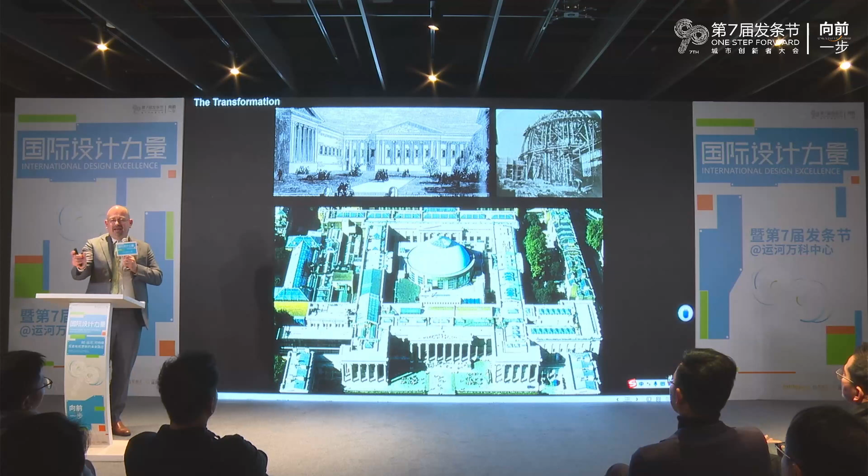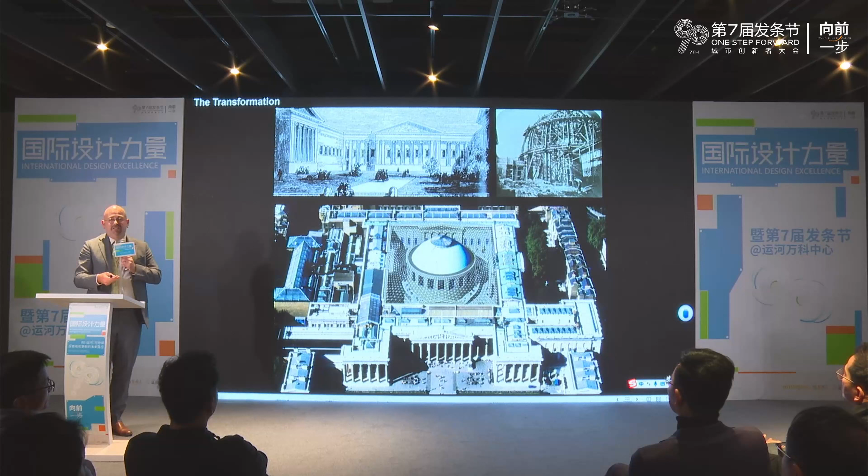The first project, the British Museum, is an old institution that's been around in London a long time, but like most institutions, it needs a refresh once in a while. What happens very often with old buildings is they accumulate many extensions, bits get added on, and they become quite messy and confused. Our approach was to strip away all the bits that weren't inherent in the original, and create this great court in the center. By stripping away the unnecessary bits, we created a whole new space for the public, and this has become one of the most popular tourist attractions in London, a major square in itself.

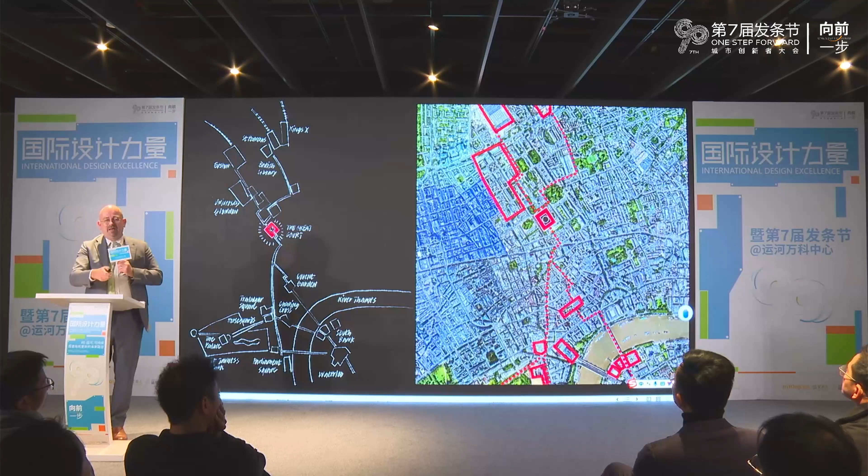Another view to the side, you can see the bits that were added on and then stripped away. By really understanding the buildings you're working with, you can shape them into something new — again a 1960s addition there, stripped away. Not only does it create space, it also enhances the appreciation of the original building. Perhaps most importantly, this has become a square in the city, linking together this whole network of spaces throughout London. Instead of being a barrier, now it's another public space for everyone. I think how we can creatively reuse these buildings can make a difference.

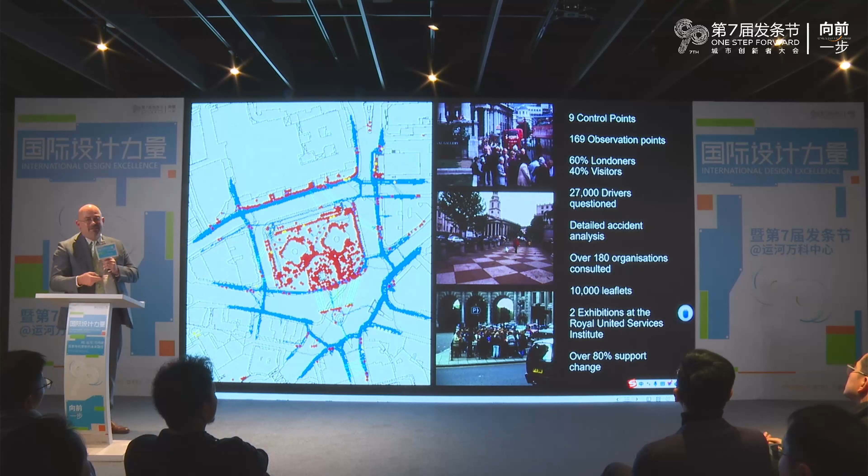Something that seemingly seems quite simple was in Trafalgar Square, where we closed off a road — that sounds relatively simple in itself. It created this amazing space; Trafalgar Square was effectively a roundabout, and now we're turning it into a major public plaza. But for that to happen took an incredible amount of analysis: 27,000 drivers were questioned, accident analysis, traffic analysis. So much detailed work had to happen to make that a reality.

And of course, all the public consultations we had to undergo. Although it was just a case of shutting a road, it was an incredible amount of work. Before, it was completely closed off; now we get the public moving in, so it's transformed this underused area into a major public space. The centre, which was underused, becomes now a place for entertainment, and it's now possible to even hold some very large events there. For example, when London won the bid for the Olympics, there was a big celebration there, and of course Chinese New Year is always celebrated there in London for thousands of people.

The Reichstag in Berlin is a building that was heavily bombed and damaged during the war, so it had a lot of history to it, and how we reinterpreted that history was quite important. It's also important to mention that you can make these sustainable buildings — here we're using solar panels, biofuel to operate the building, and also using thermal stores, so we can make them sustainable.

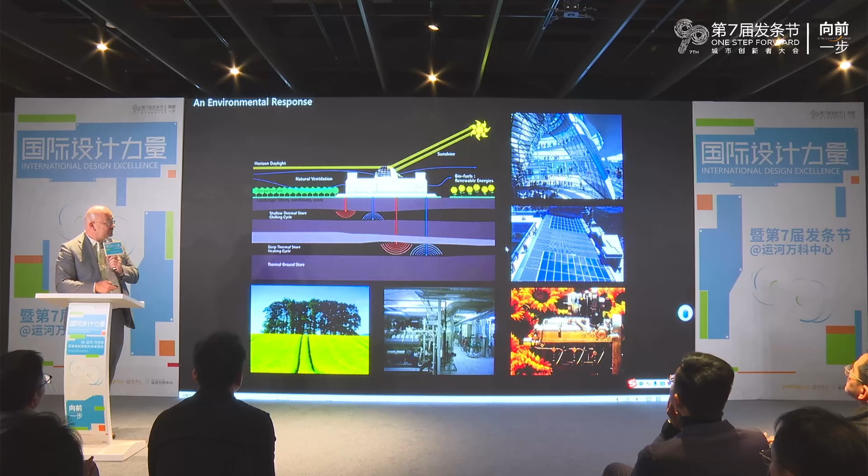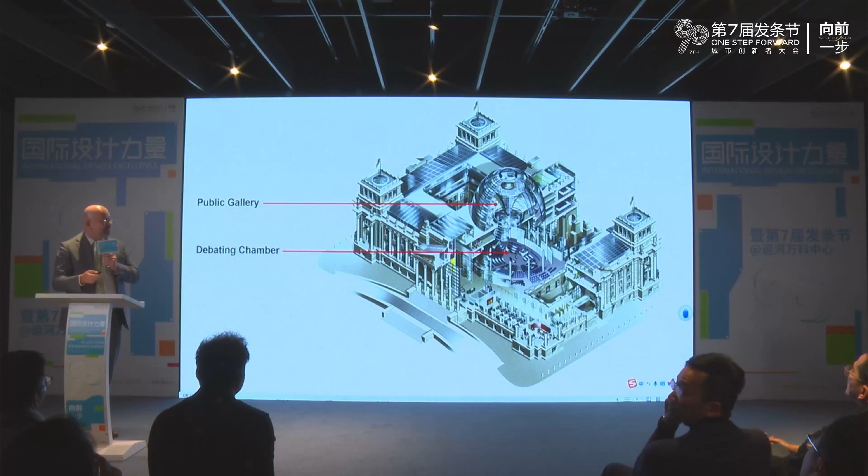So basically the big spaces, we had the new debating chamber at the base, and above it we incorporated this new public gallery.

On top of that, we also preserved a lot of the history. There was a lot of graffiti, and I think your initial reaction is to strip that away, but there's a lot of meaning in this graffiti. While we couldn't keep all of it, a lot of it was documented, and some bits were kept to keep the memory of the building alive.

The public gallery on top has two meanings. One, you can look down to the debating chamber below to see what's going on. But also you can walk up the spiral ramp and get incredible views across Berlin. This has become probably the most popular tourist attraction in Berlin.

So it's not just regenerating the building, but the whole area around it as well—transforming all the businesses and things that happen around it. I particularly like this image because you get this contrast of the old and the new, and how working together you can create some very powerful projects.

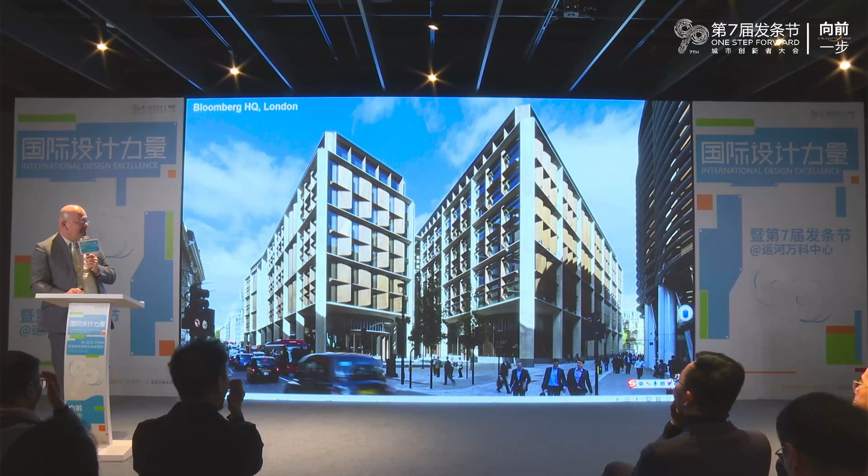Back to London, this is the new headquarters for Bloomberg. It replaced this old 1960s building for Legal and General, in a very historic part of London, very close to St. Paul's.

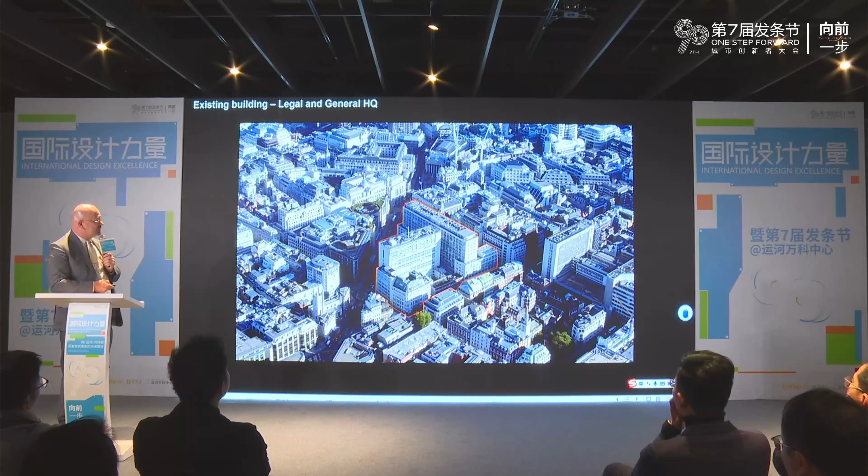The idea was that it shouldn't be brash, it should be respectful to the history of the city and its surroundings, so it needed to blend in. That came from Michael Bloomberg himself. So you can see the modern building still uses traditional materials of that part of London, like Portland stone and bronze.

You're probably not aware there's a height restriction. We have in London these view corridors to St. Paul's, so the dome of St. Paul's is never obscured—there's about 7 key viewpoints around the city. So we had to adhere to that.

We also looked back at the history of the city, and this was an old map that we found that gave us a clue of how we could reintroduce this historic lane back into the city that had been lost.

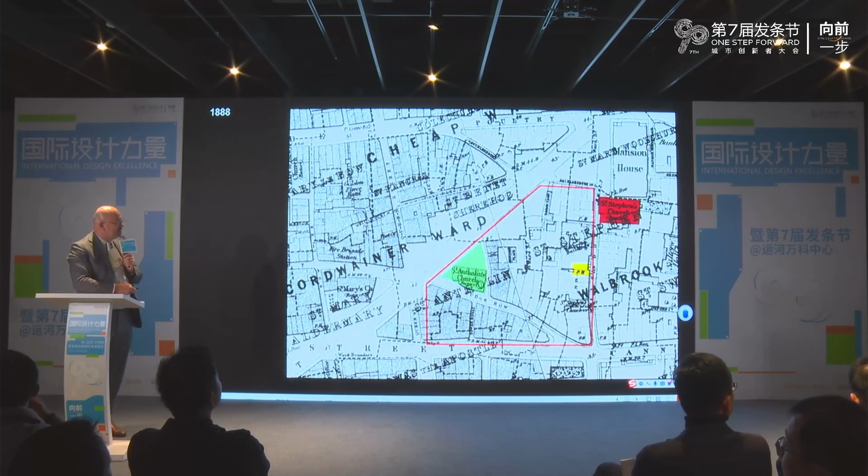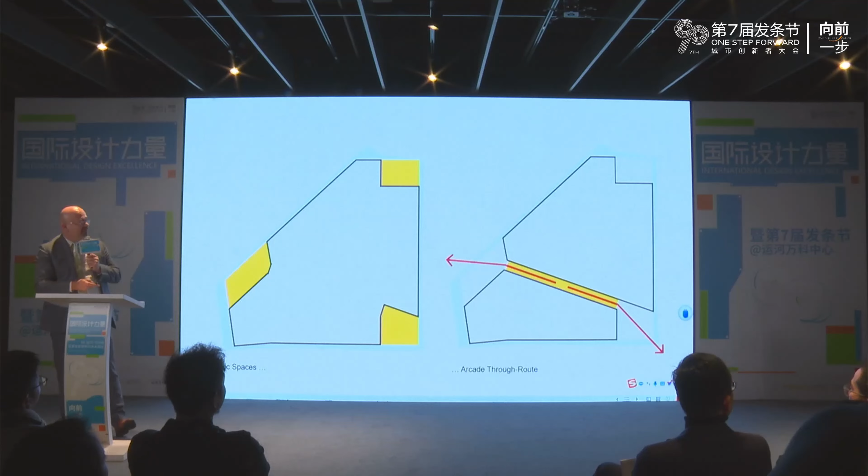So we introduced 3 public squares on each of the corners, and then we cut through this arcade to reintroduce that historic route. You can see here where you've got this now pedestrianised route up to St. Paul's, and the opportunities that it gives you inside the building.

This space is actually where all the staff come as a socialising space, and they get this fantastic view of St. Paul's. At the base of the street, we reactivate the street, we introduce retail, and the arcade is now a new pedestrianised route full of retail—bringing life into a new part of the city.

The squares themselves—you start to see the people occupying them, but they also have a dual role. This is also acting as a protective barrier for the building, but it's a social space in the city.

This is an old church by Sir Christopher Wren, the architect of St. Paul's. You can see how one of the squares is relating to that historic building, giving you this contrast of old and new sitting together quite comfortably.

The building itself was quite complex. The idea was that all the staff could see each other, so it was all about communication—it was one big team. They wanted all the staff to visually see each other.

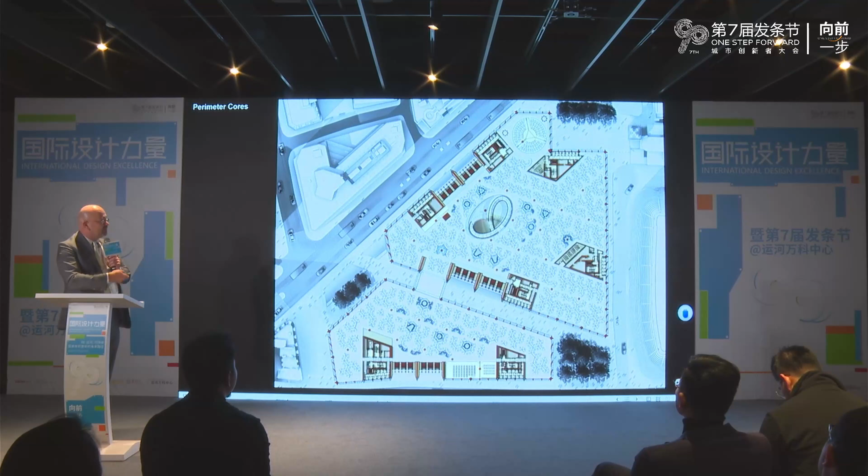This led us to putting all the cores on the outside of the building, which is a bit counterintuitive when you want light and views. But it was all part of the company strategy.

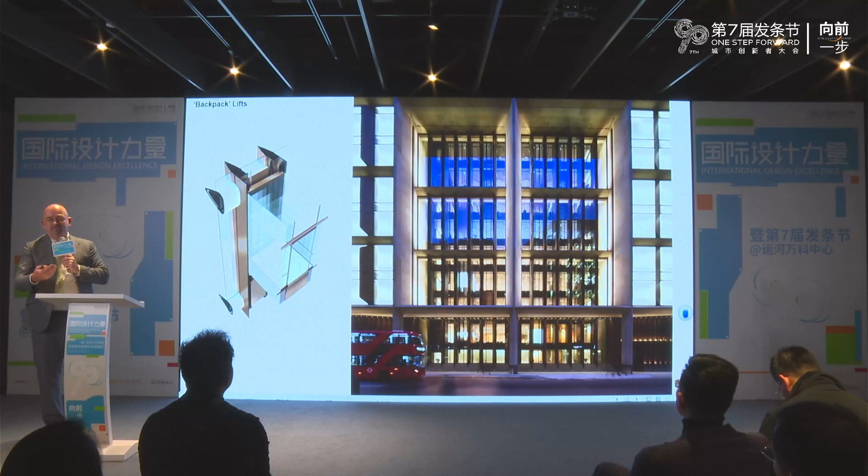So we had to find innovative ways of dealing with the core being on the street and blocking off the light. We designed these new lifts, so when you look at the building, all the views and the light actually still come through, and the lift isn't a big concrete structure blocking the light and the views.

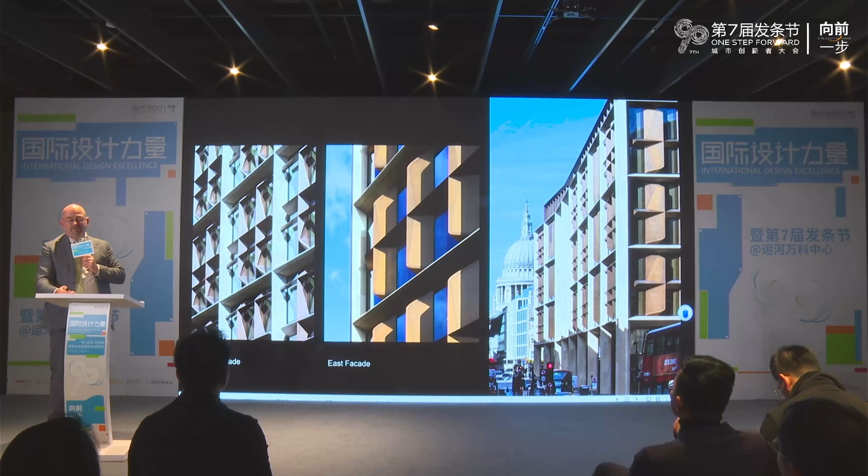And so then looking at the facade, although we were using very traditional materials, we also looked at ways of naturally ventilating the building. So those bronze blades that you see there are bringing natural air into the building, and this gets sucked

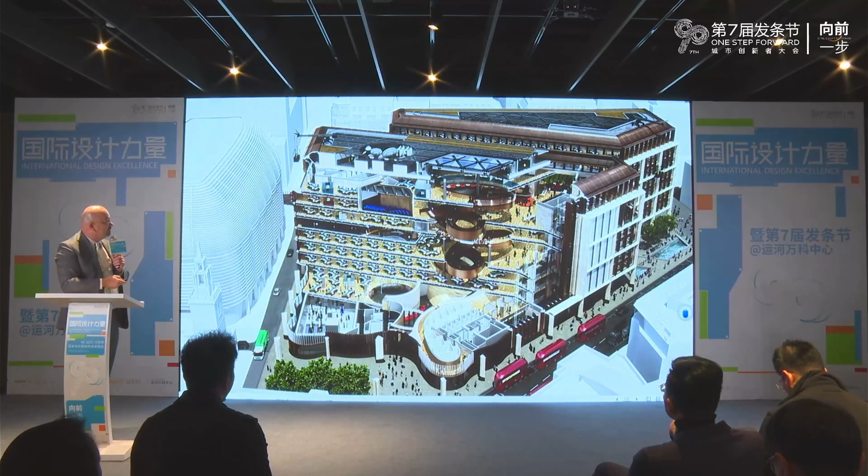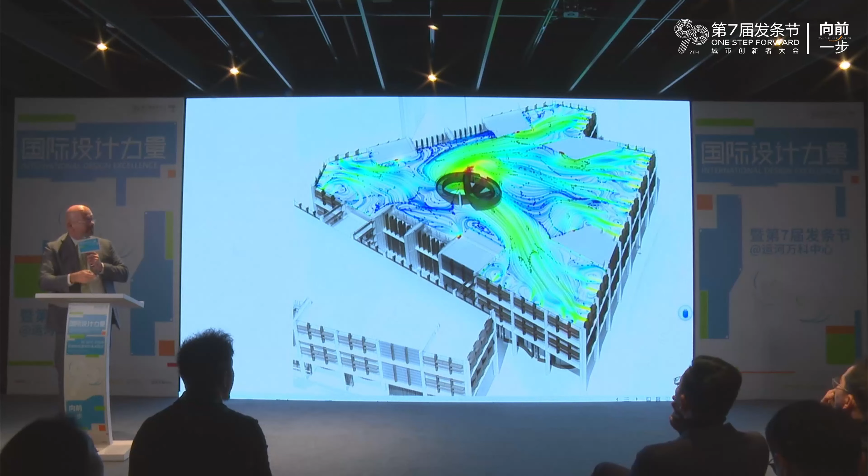through up into that atrium space in the middle, which you can see here from the CFD analysis. So the air comes in through the outside and up through the spiral in the middle, and this is where the air comes out at the top.

And you can see how that spiral also gives you three-dimensional views to the other floors in the office. Again, it's not just visibility across one floor, but between floors, which is important. So this idea of the spiral goes through all the office spaces, connecting everybody, and down to the main entrance space at the bottom.

And so the ceiling itself was designed. These were individually made ceiling panels that were to deal with the acoustics. It also deals with the cooling and the LED lighting, so it was a multifunctional ceiling. But you can see from the outside it has quite a dramatic effect.

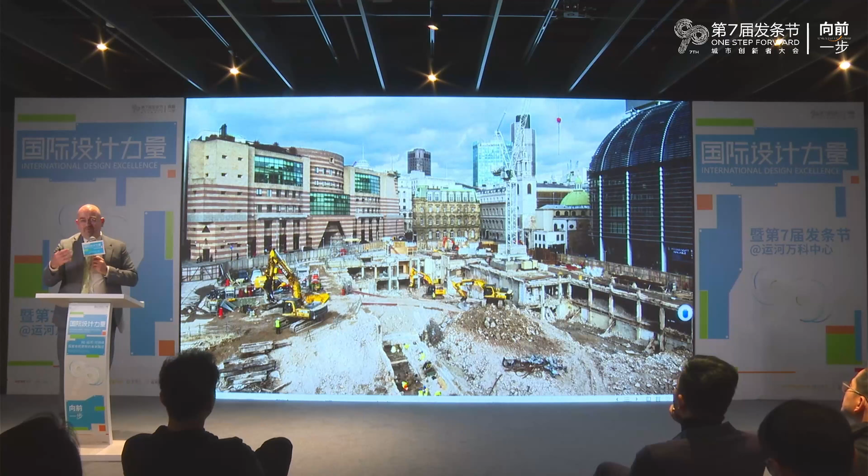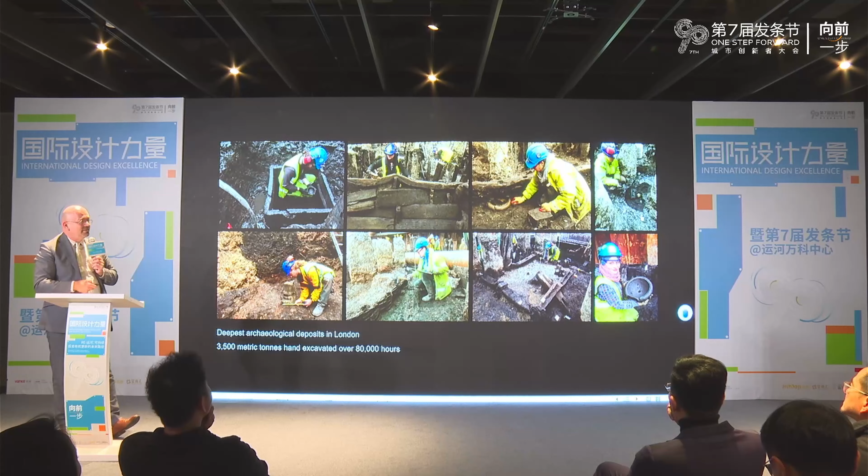So one of the problems you get when you're working in London is there's a lot of history buried below, and as they were excavating the building, there was a lot of archaeological analysis done - over 80,000 hours of excavation done by hand. So there's a lot of history being discovered, and they found up to 63,000 pieces of history down there.

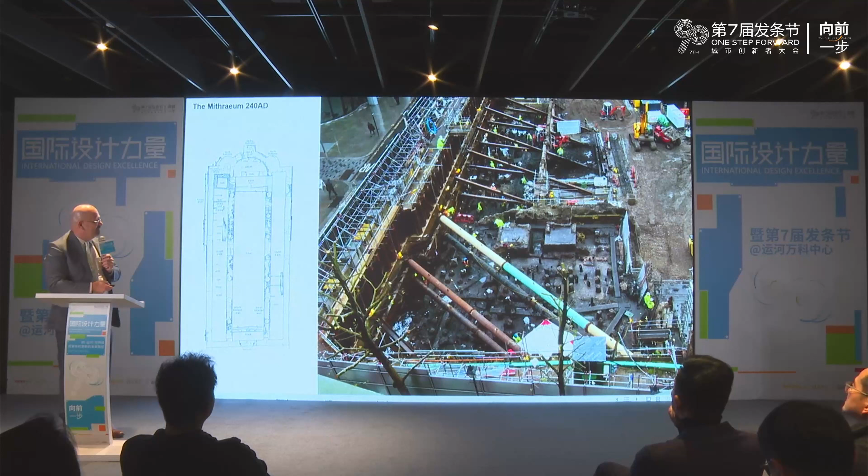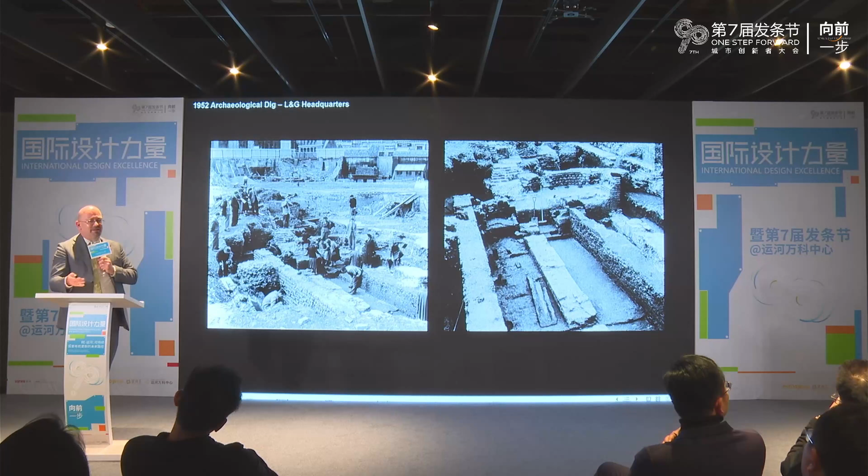But most importantly, they found this old Roman temple, the Mithraeum. But what was interesting about that, it was that it was in the wrong place. When they did the original archaeological dig back in 1952, they actually moved it because that Legal and General building, which I showed at the beginning, they didn't want it to interrupt the car park, so they moved it. So the building was actually placed away from the site.

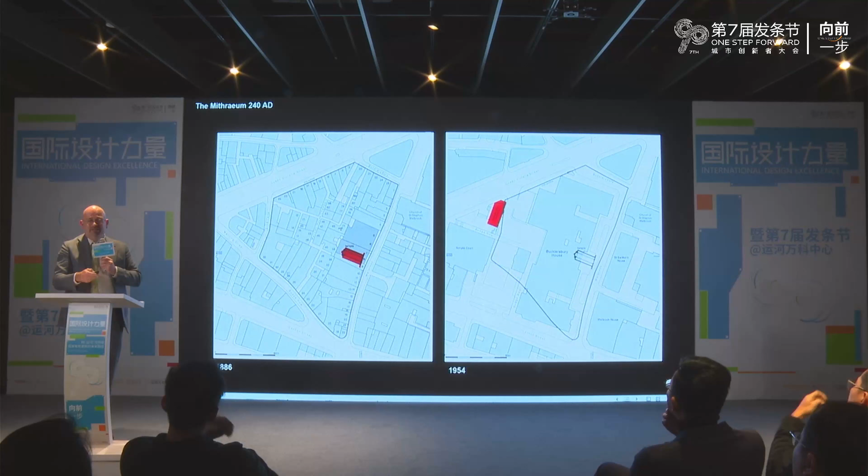So as part of our project, we wanted to return it back to its original location. So we incorporated it back into the scheme in its rightful location. And then Bloomberg created this public exhibition space - it's free for everyone to enter, a nice piece of history, and they also did a fantastic light show and a sort of educational element to it. So if you're in London, you're free to go and visit.

Closer to home in Shanghai, we had to look at the new Bund Financial Centre. So we were dealing in probably the most sensitive areas of Shanghai, the historic Bund. Interestingly, a lot of it was based upon buildings in the UK originally, as it was the original British concession.

But you can see the site - it's a very complex site because it's right next to the historic old town. It's at the end of the Bund, and it's also leading the way to the new sort of financial centre. By this time, Pudong was pretty much well established, so you've got this sort of views from Pudong looking back over as well.

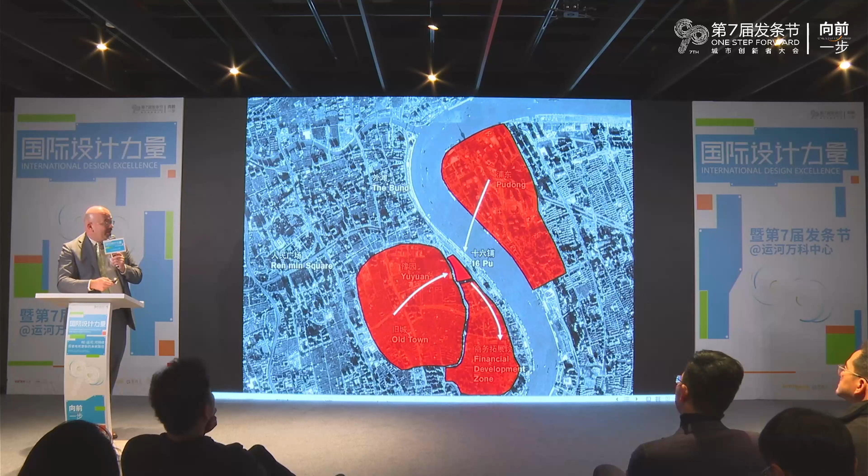So we were effectively finishing the Bund before the start of the new financial centre. So we had to really look carefully at how the Bund was constructed and how we sensitively put a new building into this context. So we looked very carefully, and what we noticed was there was a lot of intricate stonework, a lot of highly crafted stonework, and some different textures as well.

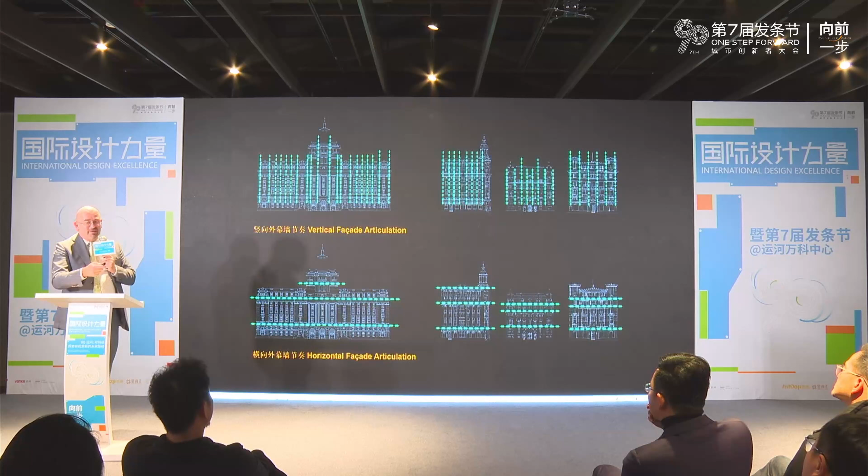And the metalwork was even more detailed - it was particularly fine, and the level of craftsmanship is just fantastic. So we undergone an analysis of the Bund buildings and how they were constructed and what was the basic principles of that. We analysed the rhythm of the facade and the symmetry, and the fact that there were 3 different zones that, although they were very different buildings, there were some rules that allowed it to be harmonious across it.

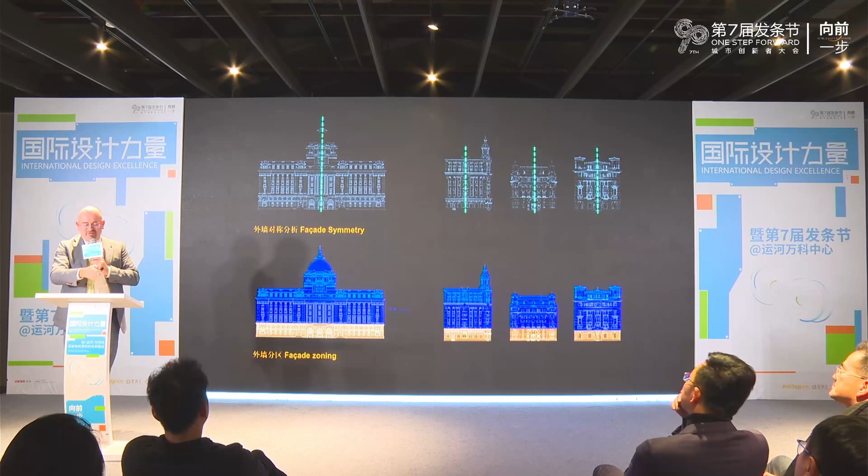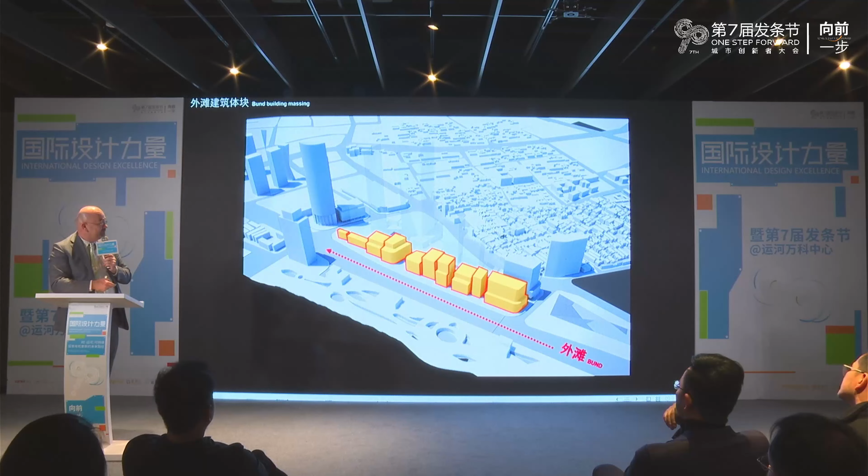So we had to understand that and work with that. So we started to create these blocks along the edge of the road, which gave us this sort of rhythm. You can see the rhythm of the Bund, the hierarchy of the flow of the roofs, and the triple layers in the facade.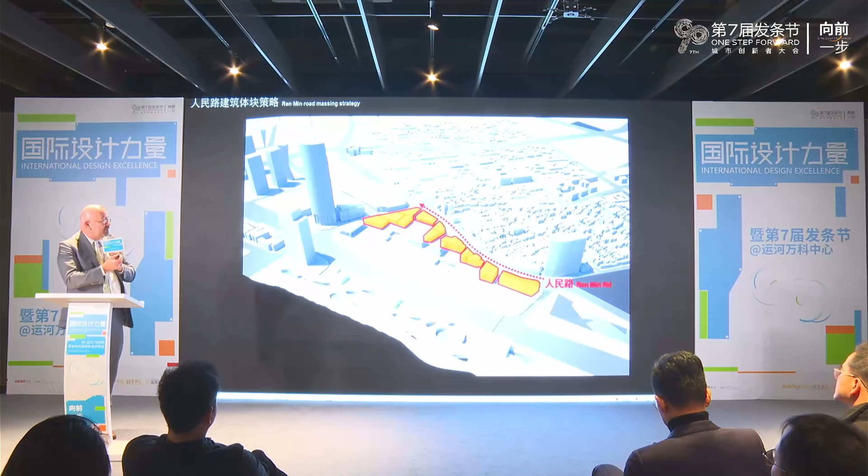But on the other side, we had the historic Old Town, and this was a lot smaller and a lot finer grained, so we had to respond in a slightly different way. So again, we did the same sort of analysis, which resulted in a much smaller, finer grain. So the development was stepping down to the grain of the Old Town, and you get this much more finer richness than you get on the Bund side, which is a bit grander.

And then we introduced some of those textures and materials and craftsmanship that we saw on the buildings. We did it in a modern way, but it was still respecting the feeling of the old.

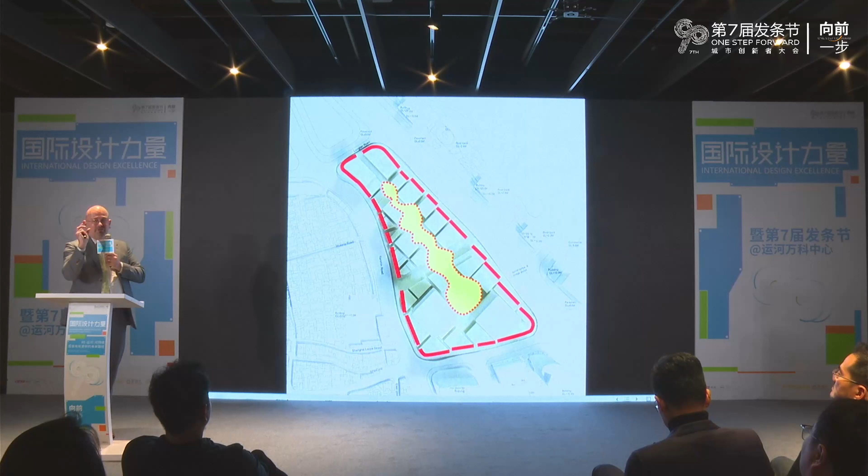And then we'd have to think about how we introduce public space into the development. So now we've done the perimeter, we wanted to create a central space for people to gather. So we created this canyon that was fully enclosed and allows events to happen inside.

And then we have to connect. We didn't want to block the development, block people from going to the river. The promenade is very popular, so we wanted to bring people through by opening it up.

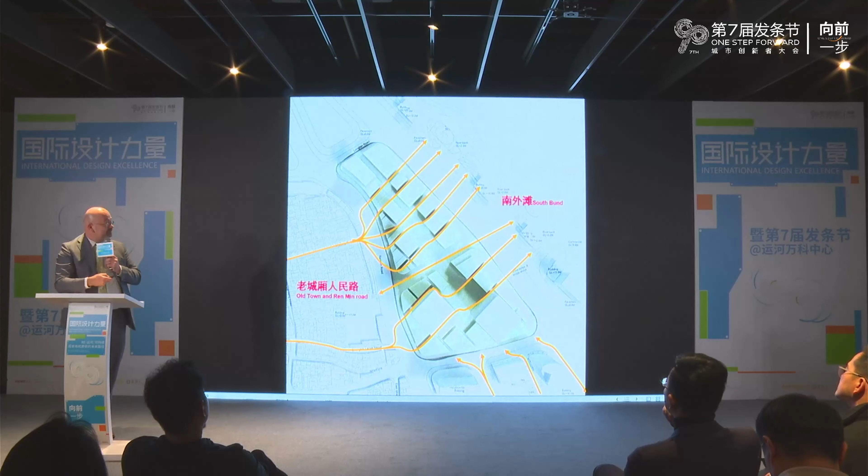And then we had the two big towers to deal with. So there were many constraints. We had to be sensitive to Yu Yuan Garden, sensitive to the views of Pudong, and sensitive to the views from the bund itself. So we didn't want the two towers to be merged into one enormous tower.

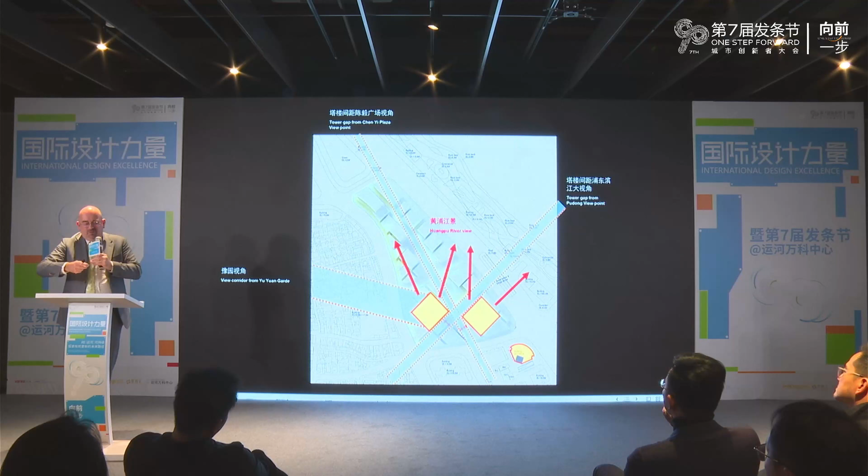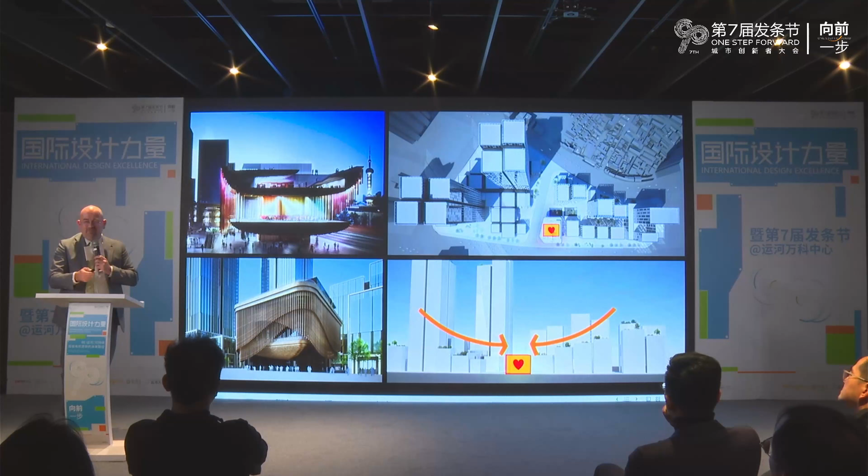And then as a centerpiece, a gateway to the project, we did the cultural center. So this is bringing a public facility for people, a bit more engagement rather than just commercial activities.

So the cultural center, I'm sure you've seen before, but this is based on traditional theatres and the wedding veil with the rods. Some people say it reminds them of bamboo.

And you can see the triple layered screen, which changes depending on what's going on inside. So you can open it up to the view, or you can close it down if you want a black box exhibition.

But more importantly, it has a lot of public space around it. So underneath the building, there's a nice cafe space that's opened up, and at the top, you've got the event space. So it's not just a building itself, it's how people can use it and create space.

And then we had the road. So when we got the typical master plan drawing, it had a road, and it was divided into two plots. But we wanted it to feel like one cohesive district.

So what we managed to do was create a shared space. During the week, the road is still active, but at weekends, it gets transformed into a market. It's quite popular at weekends, and it's quite amazing just by allowing these activities to take place, how you can transform parts of the city.

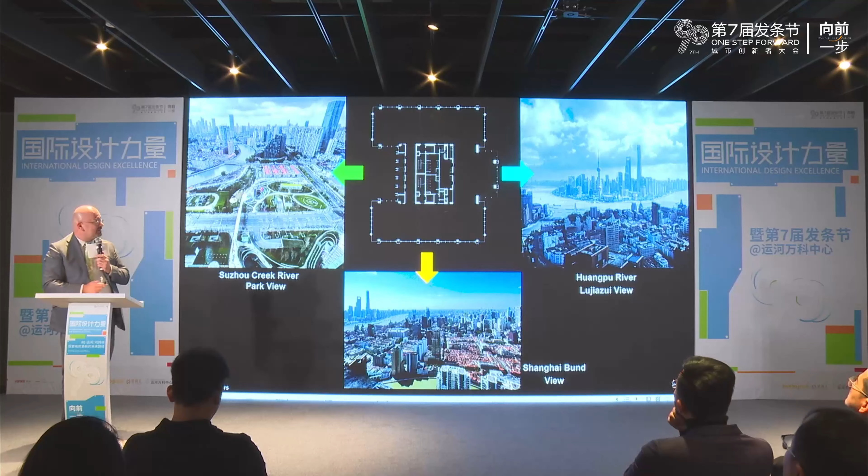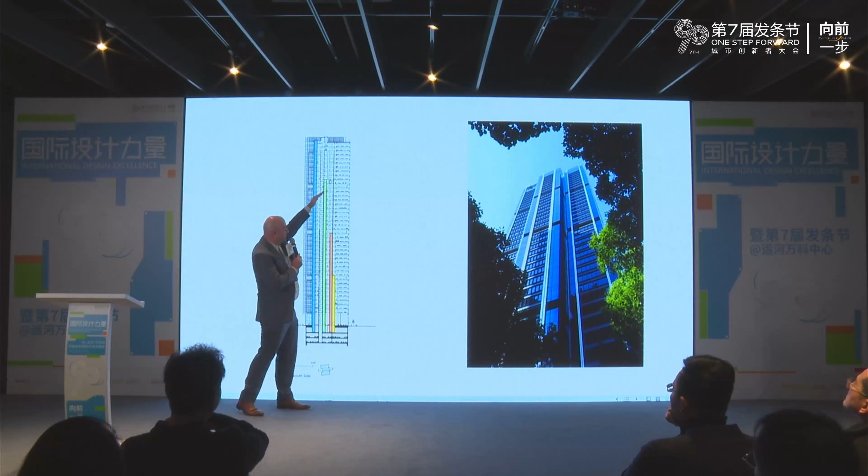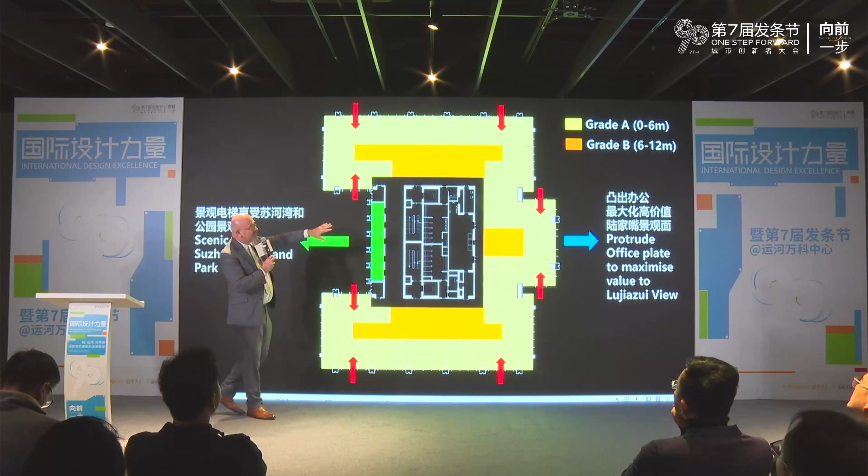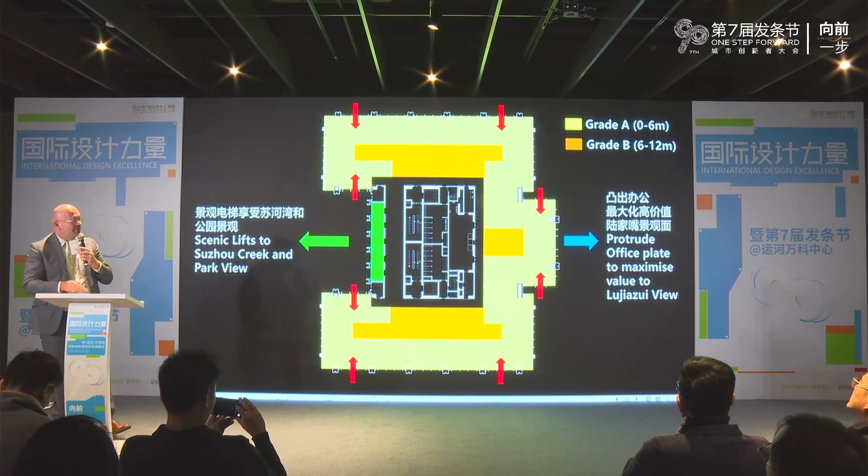So what we did was we used the lift core in the middle, and you can see how we've stepped it down. Where we got the views across to Pudong, there's no more lifts, so there's more office space at the back, and the lower floors look towards the park. The core is placed in the middle with scenic lifts facing the park, and as the lifts drop off at the back, you get extra floor plate to experience the views. With the two wings, we've got column-free office floor plate, which gives ultimate flexibility. This is the actual photo of what you see at the top. But as I said, the context in which we're building is very important.

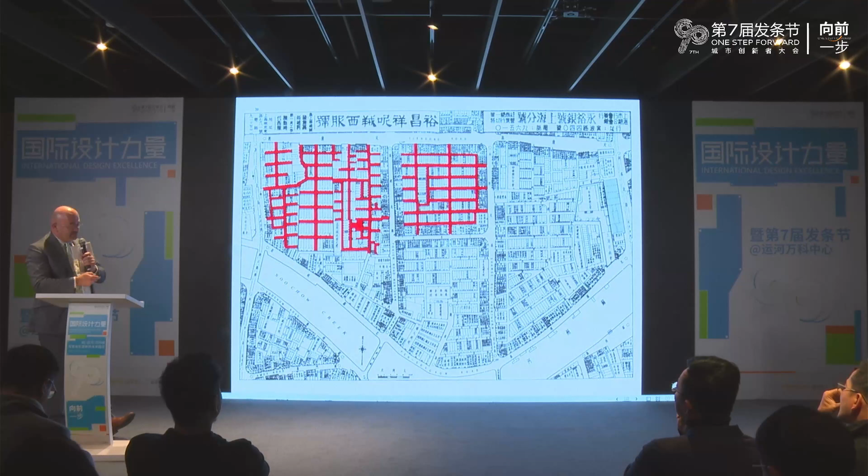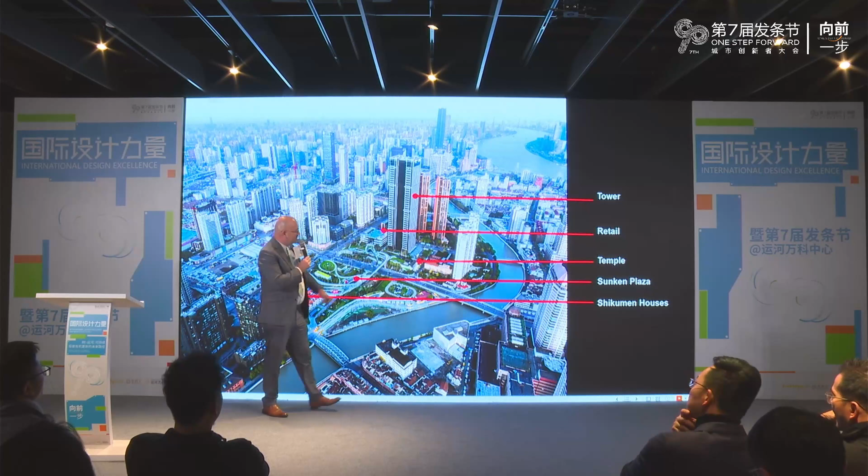This was an old historic map of the site, and you can see the layout of the old Shikumen houses. In this far corner here we managed to preserve a section of them, and then we've got the park with a little pop-up retail. All under here is a whole retail development, and there's an old temple situated here. So there's a lot of history going on with this new development, and you can see how the old and the new start to come together - the modern art with the temple, and how the Shikumen houses have started to influence the design of the retail underneath.

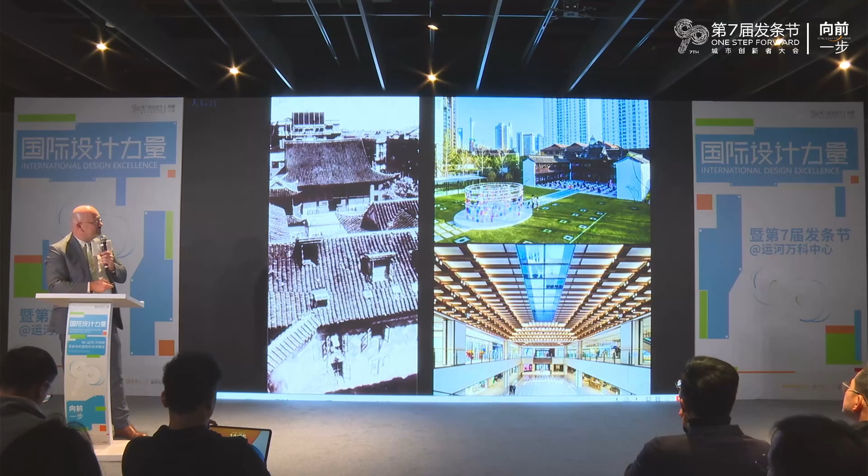All these Shikumen houses were repurposed and became retail and restaurants. I quite like these images of this contrast of old and new sitting together. It's one of the things in London where over time you get these layers of history, where different periods of building all start sitting together but comfortably.

Another thing they've done, which is very clever, is to start to bring art into these spaces. If it's done very cleverly, you can see how that begins - it's not just another shopping mall, it becomes a place of culture. How we use art and integrate it, ideas like this are really incredibly clever. Art and the buildings also help people wayfind when they move around. You can get lost in a shopping mall, but once you see a glimpse of the sculpture or the building, you start to know where you are.

Back to London. This is an area called Spitalfields, sort of east end of London, for those that know London. Quite a historic area, but it's a very business area, so the land values were getting quite high. This site was originally an old market, but the land values meant the market couldn't remain the size it was - it had to change, it was very, very valuable.

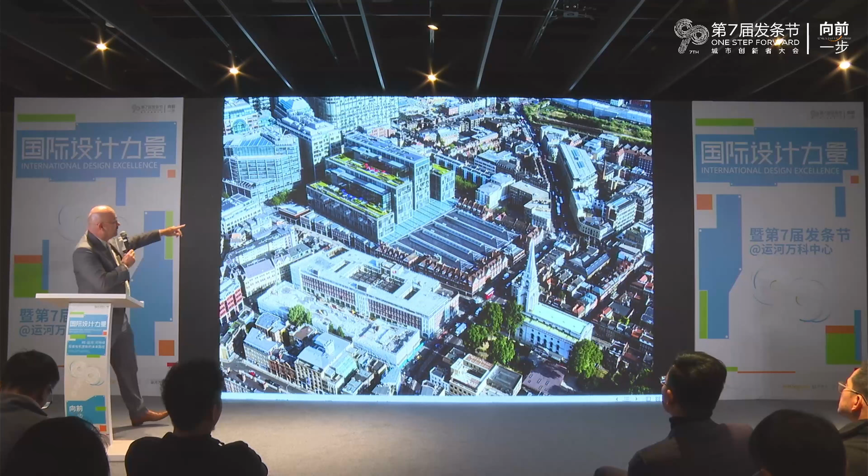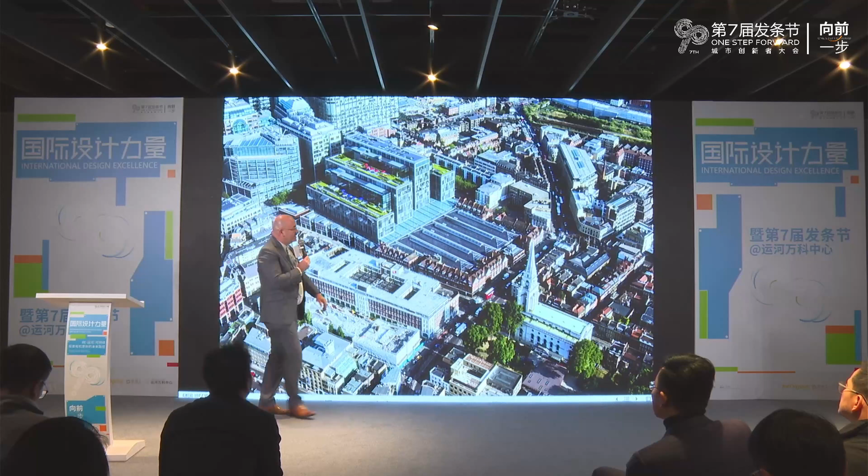So we were asked to design this office building here. You can see how we've got the new office building, and we introduced some retail here, being sensitive to the context of this street. We have a smaller market retained here, and a famous Hawksmoor church to the side. You can see how we've sensitively maintained the street frontage to create that feeling of the street, and kept the view of the historic church. The junction between the old and the new is with this glazed arcade, and you can see the glimpse of the church right on axis through that.

Once the building was completed, we were asked to help rejuvenate the market. So we started to replan, and we designed a lot of the market stalls and installations in the market itself to freshen it up and give it a new lease of life.

And then following that, there was almost like a third phase where we were asked to revisit it. This was post-COVID, and things are changing where office space is now suddenly a lot of people working from home. There's more office space available.

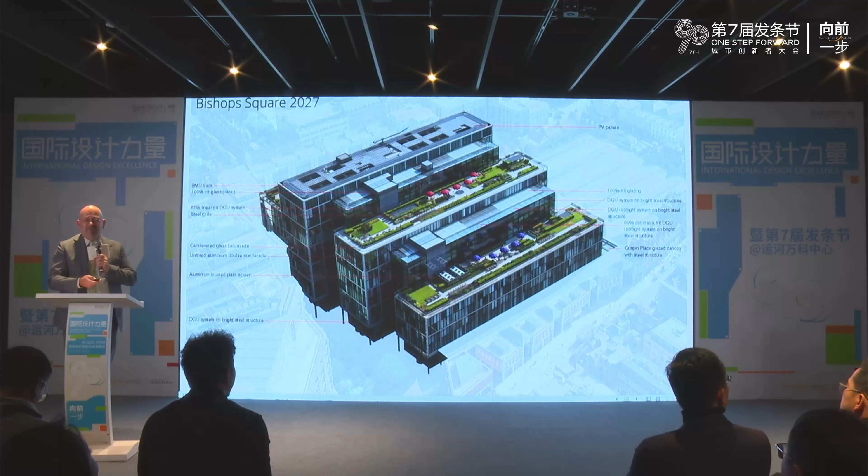So what do we do with these old office buildings? One idea is to convert to residential. Another idea is to reshape the office space into something that's a bit more what people are looking for in modern office space. They want things a bit more like your living room, more casual. So we looked at taking apart a building we'd already done and trying to reshape it to create some new spaces.

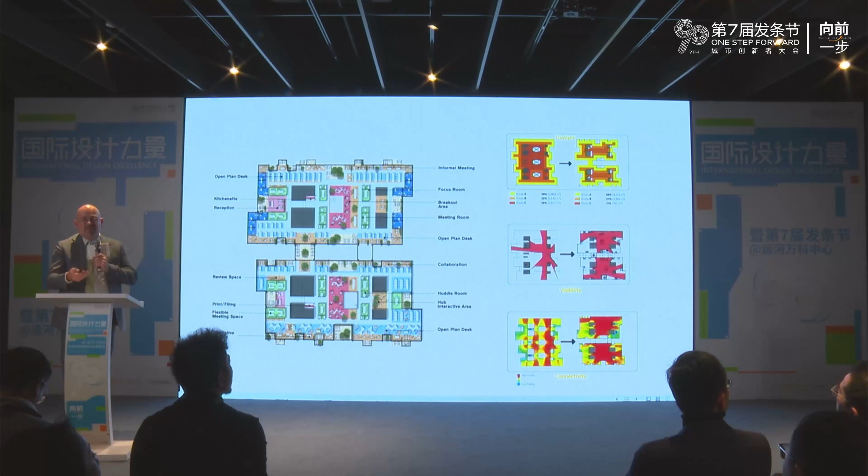So what was probably a fairly ordinary floor plate, we start to look at bringing in new areas of natural daylight, replanning it, more social spaces. So what was a fairly standard floor plate now becomes full of light wells, and then by working our way down into the basement, we can start to activate it and connect to the existing retail around.

So again, this is quite unusual for a building that's not that old. We're now looking at repurposing or reshaping projects that we've already done, and finding as trends change, we have to rather than knock it down, rework with the existing buildings. And so you can see how it's completely changed in appearance, but the basic bones of the building are still there.

And we've seen a lot of change in retail. So this is the Whiteley in Bayswater near Notting Hill. What we've seen in London particularly is department stores were very fashionable, but then people are shopping more online. There's a resurgence of street retail. So these things are dying. So we were asked to look at this, and find a complete new use.

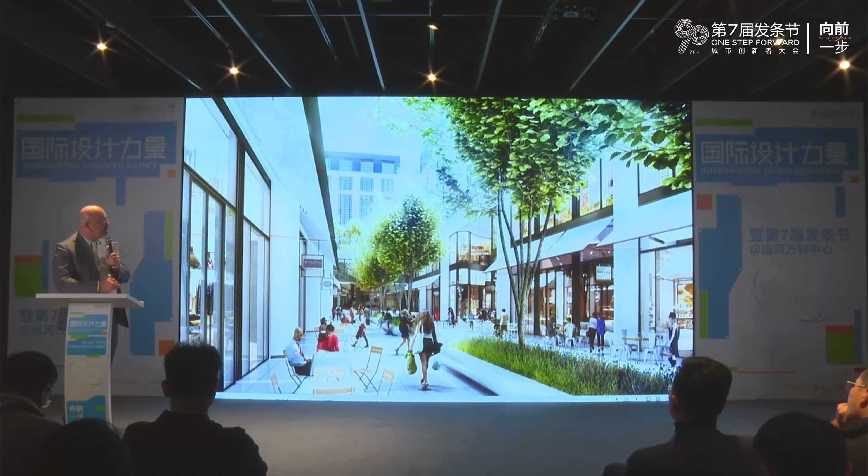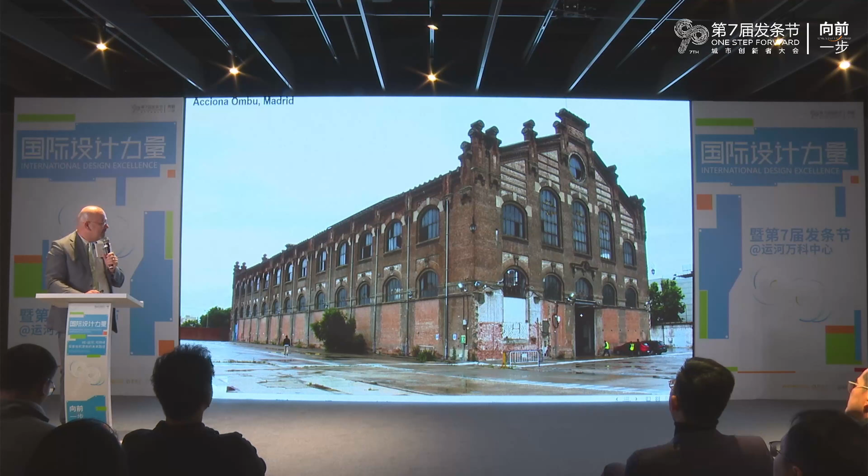And so this is all working with an existing building. This is quite an interesting project, another industrial heritage. This is in Madrid, and I think it was a form of power station. What you find is that some of these buildings had multiple uses over the years. I think this one was even an armaments store at some point where they used to keep weapons. So it was in a poor state, but we were asked to refurbish and regenerate this building for Acciona, who are a sustainable energy supplier.

So as part of that, we had to turn this into this, and it was done because they're a sustainable energy supplier, so it had to be done in a very sustainable way. The materials we're using, the way we're crafting the space, is all done in a very sustainable way. And again, you get this fantastic contrast of old and new sitting together.

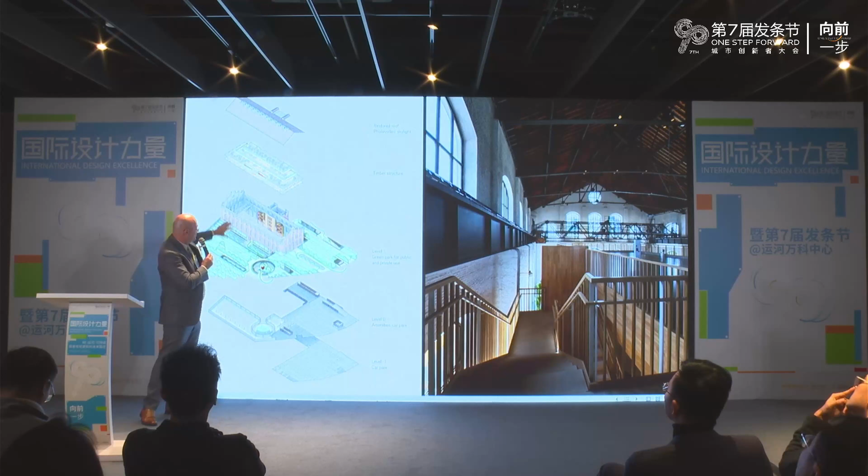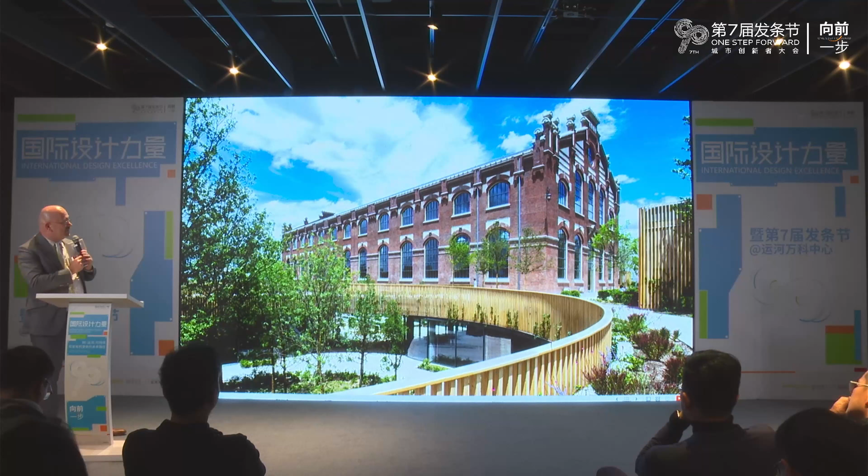As part of these works, there was also additional office space done onto the side, and that created a whole new public park for people as well. So we created space for the owner, but also something for the community. You can see the new piece in the foreground there next to the original, and you can see how that works in section - that's the original building with the new office space with the park on top.

And so you get this fantastic rejuvenation of what was probably quite a dead part of Madrid. I think the power of working with old buildings can be stronger than new builds sometimes.

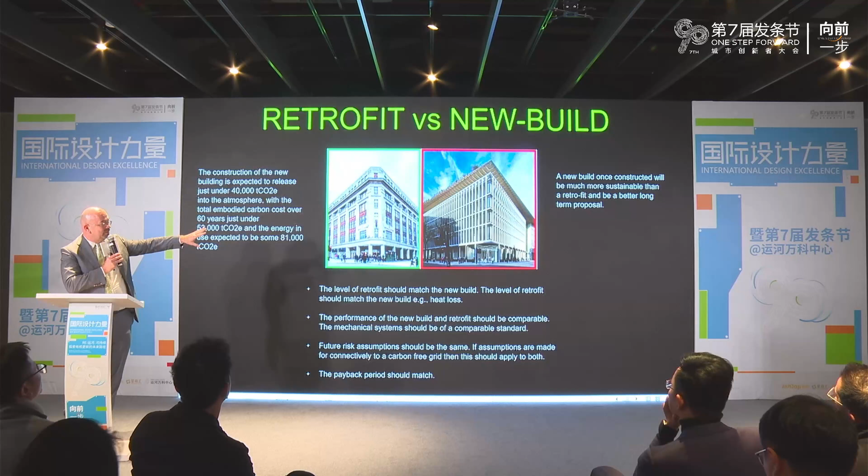However, the argument on the other side for the new build is that they can make it even more sustainable than a retrofit, and therefore over time it will be more sustainable. So this argument really, if we're to bring in planning legislation to settle these arguments, we need to fix a couple of things. I think the first thing is there needs to be a consensus in how we measure carbon emissions, because whoever's arguing for or against will probably have a different methodology, and therefore the numbers don't tally.

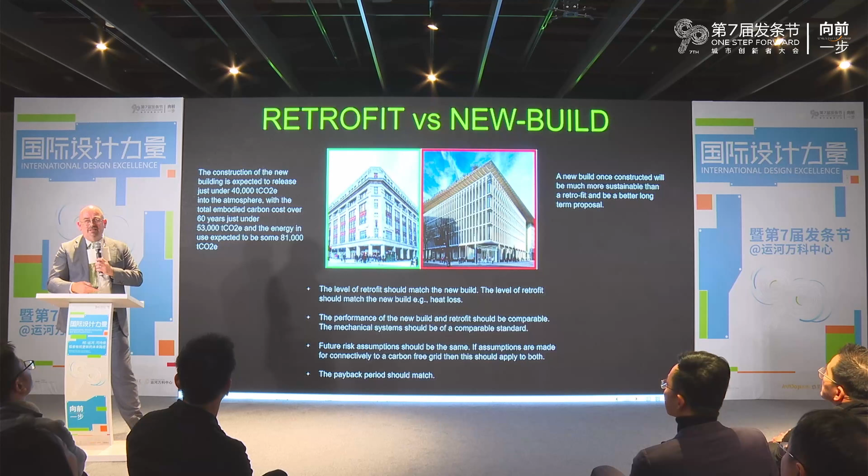The other key thing is you need to agree a payback period, because if you don't agree the timeline over which your carbon emissions are counted, it's a bit of a pointless argument. Retrofit will always win in the short-term argument, but new build, if you're looking over 50 years or something, will probably be different. So instead of it just being arguments, there's a need to bring some legislation and science into this debate.

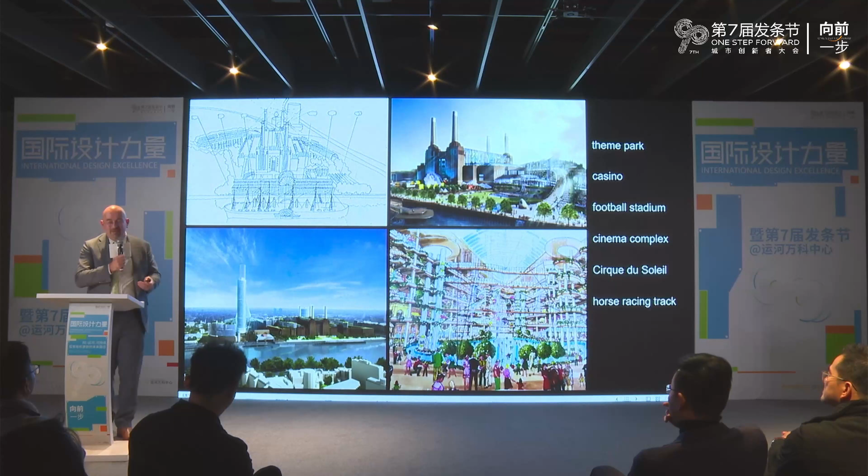But the thing was, who wanted to take on such a big project? You've probably heard of Tate Modern in London - they looked at it and felt it was too big. Over 40 years, different developers came, looked at it, and passed it on to another developer. A whole range of things were suggested: a theme park, casino, football stadium, cinema complex, a home for Cirque du Soleil, a horse racing track, and others - even a tower was proposed. So why did all these schemes fail?

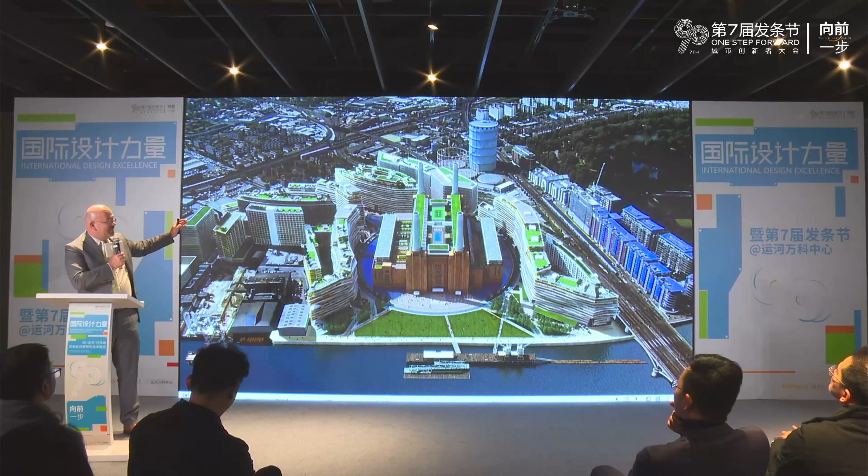Eventually, it came to the Rafael Viñoly master plan, which got planning permission. What saved it effectively was the fact that over time, each of the developers had acquired a bit more land, until at such point there was enough land surrounding the asset that it would make financial sense to redevelop the power station itself.

So this is a term I try to explain, which is the conservation deficit. If you have to spend a lot of money repairing an old building and then converting it, what is the value of that building once you've finished? If it's less than a new build would cost, then it's likely you wouldn't do the project. We like to think developers have endless pockets, but that's not always the case, and they very rarely take on a project unless they can be confident of a profit.

So there are different ways of dealing with this deficit, such as what we call a cocktail of funding from different sources - heritage funds and regeneration funds that you can draw on to help address that balance. But they are more complex, and to take on a project like this is very complex and time consuming.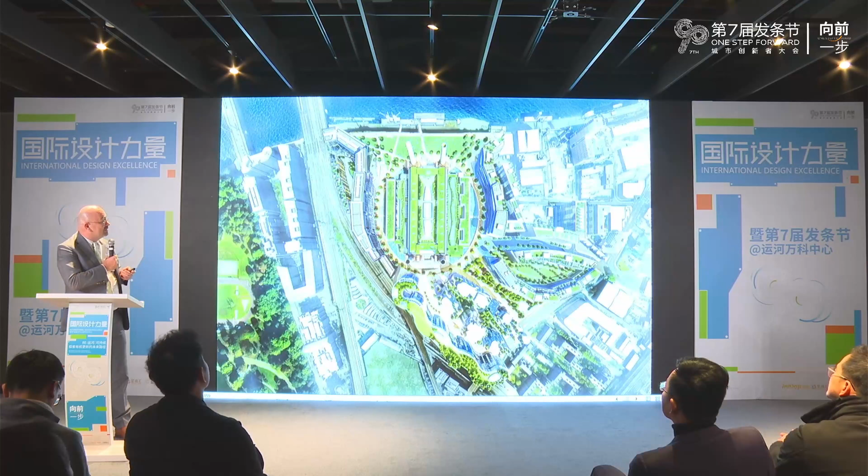So a Malaysian conglomerate basically bought the site, and these are long-term projects, which itself brings its own problems. So this is the master plan, looking from above.

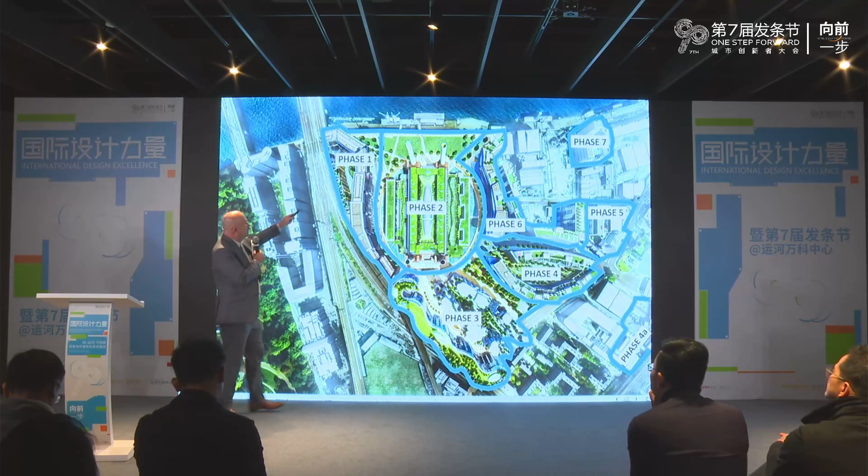So what we ended up doing was this piece of residential here, and we did the Apple offices in the middle section at the top. Just to explain, you might think, why is this phase one and not this phase one? Well, they needed to generate some money to pay for phase two. So all this residential along the river is prime residential with river views, that needed to be done first to generate income to start paying for all the works needed for phase two.

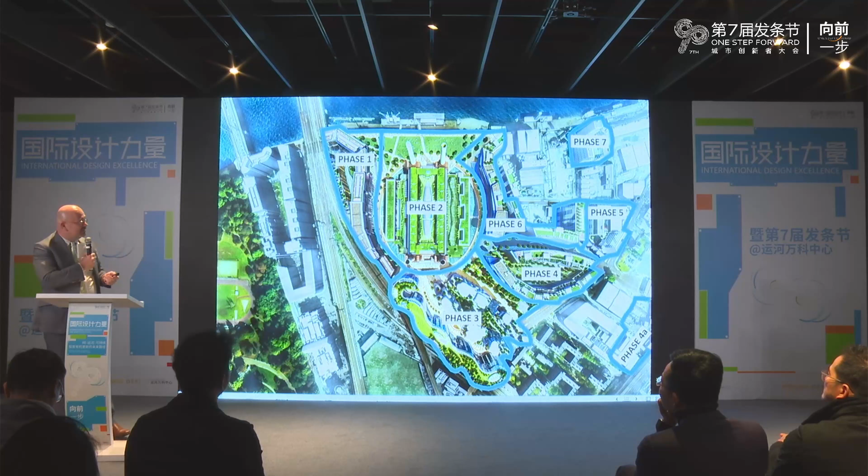And then we came along with phase three, with us and Frank Gehry on the other side.

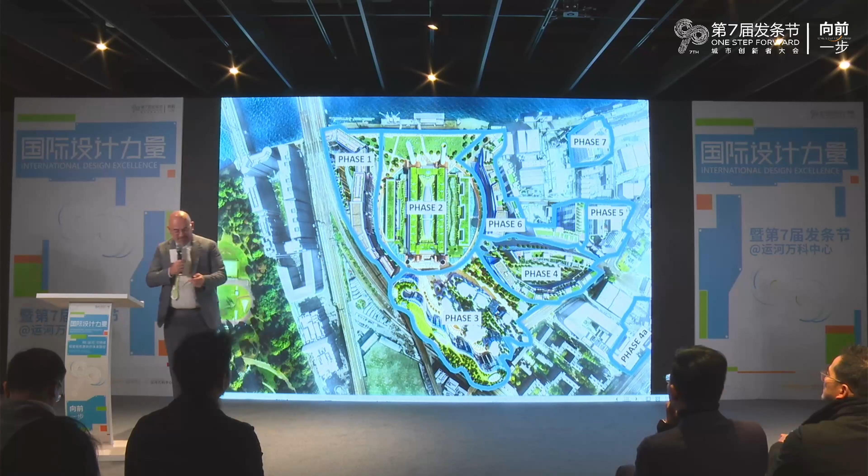So you can see here this is the phase three section. This is the Frank Gehry bit, and this is our bit. It's made up of three sections: the hotel at the front, then the residences and the office section at the back. So again, a mixed use solution.

So this is the hotel at the front, and this connection between the power station. When we designed the building, we actually used computer analysis and drones, so we figured out all the apartments either had a view of the river or a view of the power station, because that's where the value was. So the developer's looking for a way to maximize value but still create interesting architecture.

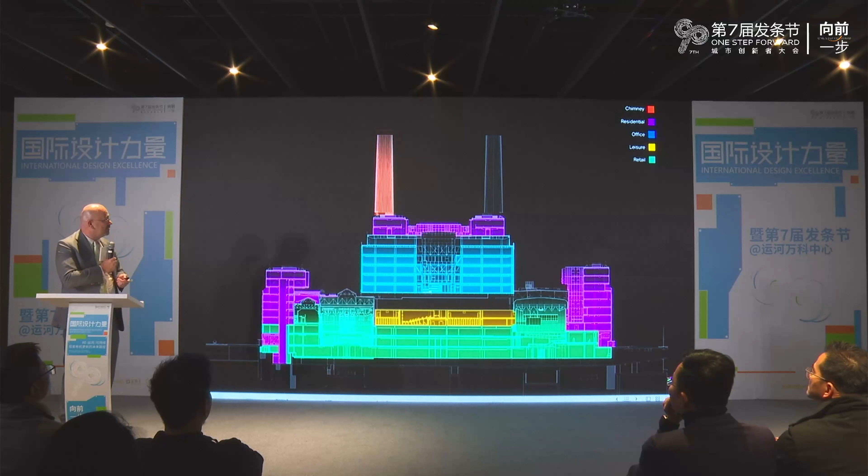The power station itself originally was built in two sections, called A and B. Power station A was built in the 1930s, and B was completed in the 1950s, so there's a lot of difference in the details between the two halves, which is quite interesting. You can see even the power station itself had a rich mix of uses.

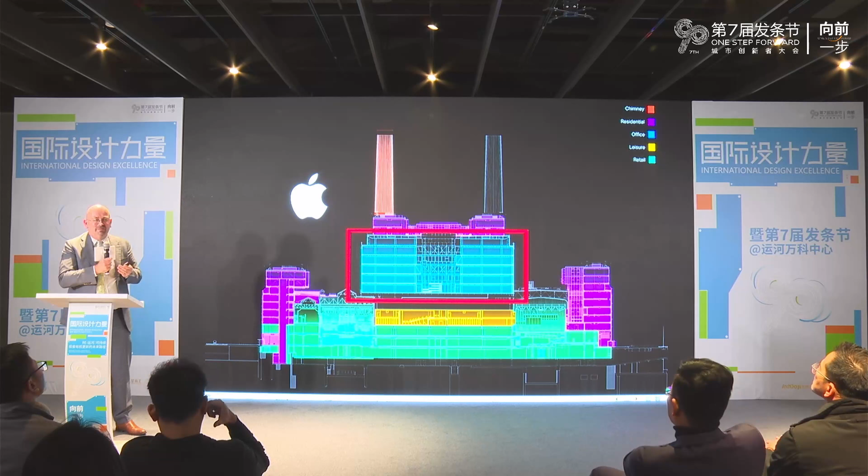We were asked to look at the new Apple London headquarters in the power station, which is interesting because of the cultural value and the iconic value of that asset—that is what drew Apple to that building. It's something very powerful that appealed to that kind of client. I think these are things that are less tangible than just economics, but they make a big difference.